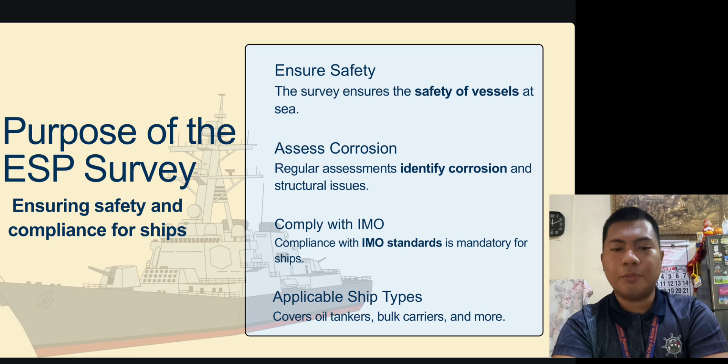The core purposes are safety first, corrosion and structural monitoring, IMO compliance and broad applicability. Ship particulars. 1. Ship name indicates the vessel identified clearly.

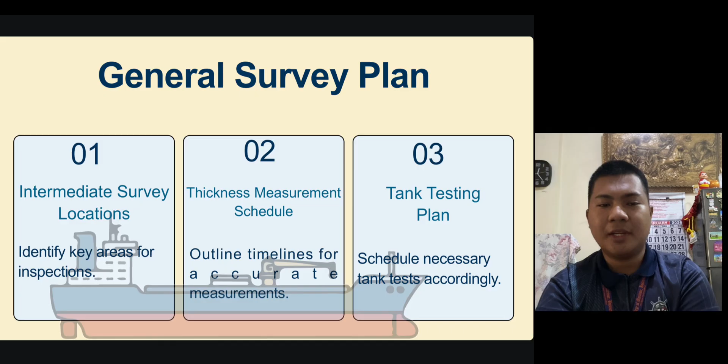Corrosion risks and inspection: key considerations for effective ship surveys. These slides outline what surveyors look for when assessing how rust and chemical reactions might be weakening a ship. Cargo history: reviewing prior cargoes, noting corrosive material use. Surveyors check what the ship carried in the past, as some materials like high sulfur coal or certain chemicals accelerate corrosion.

Coating type: assessing the condition of protective coating applied. Modern ships use protective paints and coatings. This step assesses if that armor is still intact. Structural deterioration: identify signs of wear and potential leakages present, finding physical signs of wear or spots where the hull might be leaking. Corrosion protection: verify measures in place to prevent structural damage, checking systems like sacrificial anodes or impressed current systems that are designed to prevent rust.

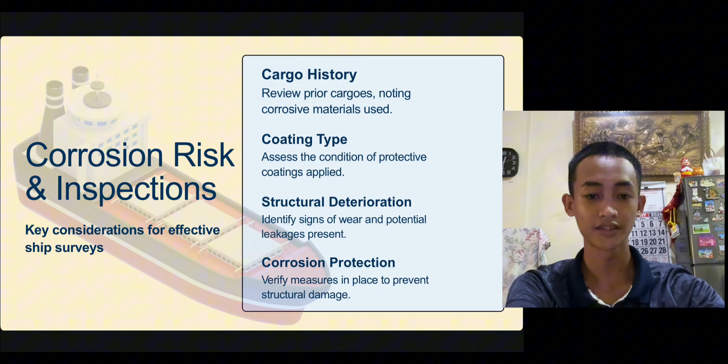Inspection and safety details the regulatory and management framework for maintaining ship standards and addressing issues found during surveys. It breaks down into three core components. Number 1. Port state control: reports on deficiencies and corrective actions. This refers to the inspection of foreign ships in national ports to verify the condition of the ship and its equipment comply with international regulations. It involves generating reports on deficiencies, problems found, and the corrective action required to fix them.

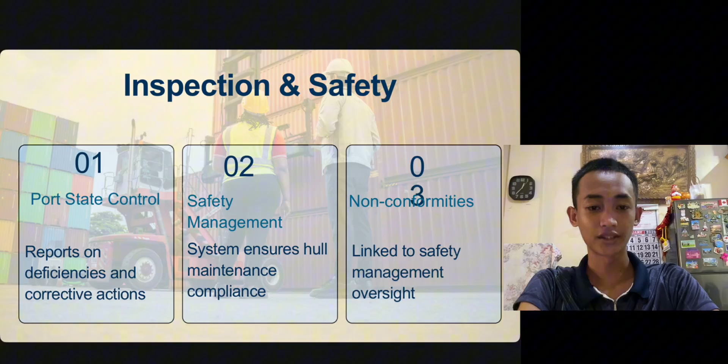Number 2. Safety management system ensures hull maintenance compliance. This focuses on the internal procedures of the ship and the operating company. The system is designed to ensure hull maintenance compliance, meaning there is a formal process for regular checking and maintenance of the ship's structure. Number 3. Non-conformities linked to safety management oversight. A non-conformity occurs when a requirement or standard is not met. These issues are linked to safety management oversight, ensuring they are tracked, managed, and resolved through the ship's official protocol.

Close-up and thickness survey: key aspects of survey execution explained. The physical execution of ship surveys, which are vital for verifying the structural health of a vessel. Survey location: identifying the specific areas for close-up inspection. Inspection identifies specific high-risk areas of the ship that require close-up physical examination. Special rules: regulations apply for ships over 130 meters long.

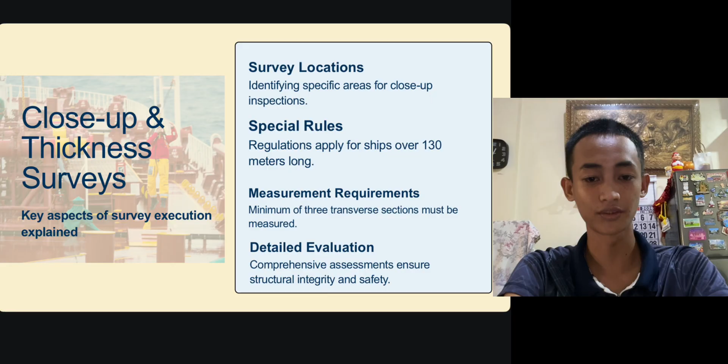These are specific regulatory requirements that apply to larger vessels, particularly those over 130 meters in length. Measurement requirements: a minimum of 3 transverse sections must be measured. To ensure a comprehensive look at the ship's skeleton, a minimum of 3 transverse sections must be measured for steel thickness. Detailed evaluation: comprehensive assessment ensures structural integrity and safety. These assessments are used to provide a final confirmation of the ship's structural integrity and overall safety.

Permissible diminution: understanding allowable thickness reduction for safety. Diminution refers to the thinning of the ship's steel due to rust and wear. This slide explains how much loss is legally allowed before the ship is considered unsafe. Ship categories: thickness reductions vary based on the ship's category. Allowable thickness reductions are not universal. They vary based on the specific category of the vessel.

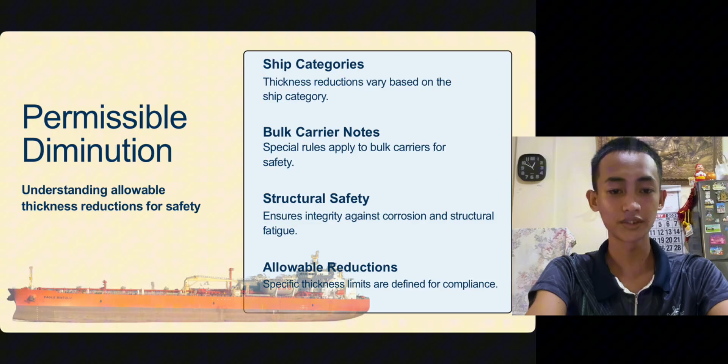Bulk carrier notes: special rules apply to bulk carriers for safety. Bulk carriers have unique safety rules regarding steel thickness due to the heavy, abrasive nature of their cargo. Structural safety ensures integrity against corrosion and structural fatigue. These limits are strictly enforced to prevent catastrophic failures caused by corrosion or structural fatigue. Allowable reduction: specific thickness limits are defined for compliance. Compliance is determined by comparing actual thickness measurements against predefined specific limits.

Access provisions. Means of access: various methods ensure safe surveyor access. Various methods are employed to ensure the surveyor can safely reach all parts of the ship. Survey equipment: specialized tools such as the ultrasonic thickness gauge are used for accurate data.

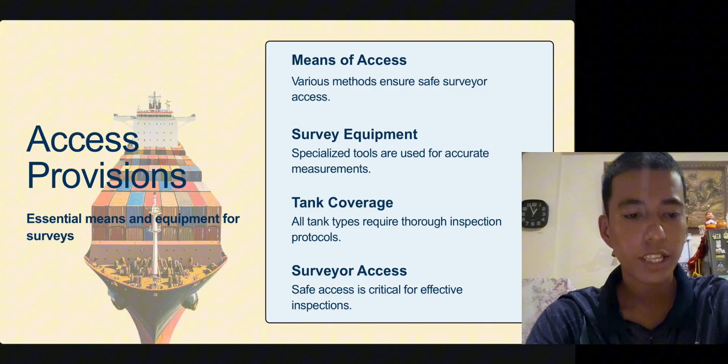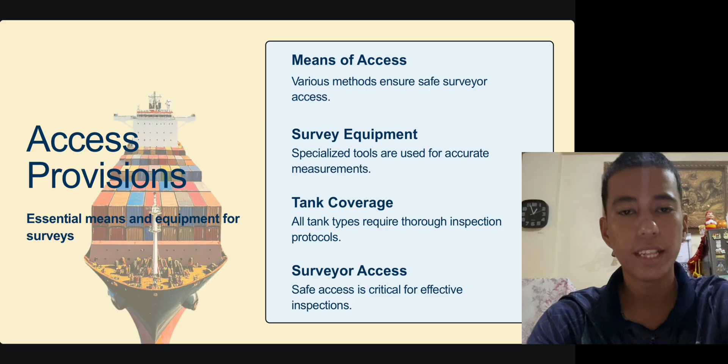Tank coverage: all types of tanks on the vessel are covered through inspection protocols. Surveyor access: maintaining safe access is highlighted as critical for effective inspections. Tank particulars. General arrangement: attach a detailed plan for tank layouts, a map or blueprint showing where every tank is located on the ship.

Tank types: specify the types and frames of each tank. Identify whether each tank is used for freshwater, fuel oil, or saltwater, and where its structural ribs and frames are. Coating conditions: checking the paint or protective lining inside the tanks. Is it rusty? Is the paint peeling? These coatings prevent the metal from thinning. Reminders: including owner and surveyor safety notes, important safety notes for the people doing the inspection and paperwork requirements.

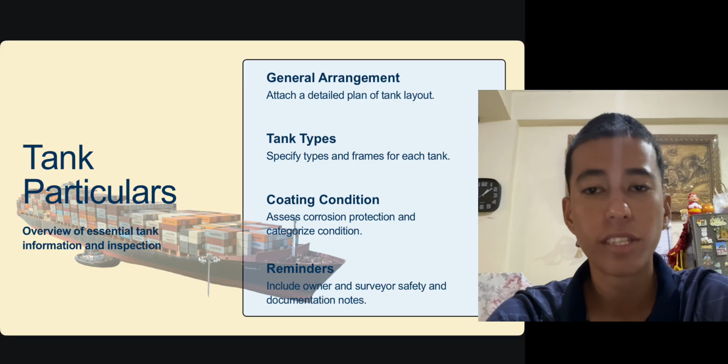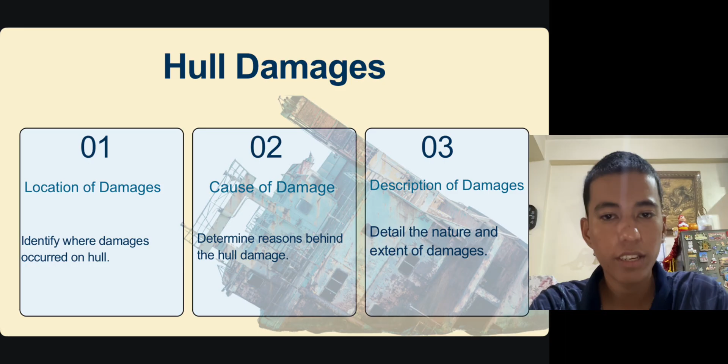Hull damage. Location of damage: identify where the damage occurred on the hull, exactly where on the ship's body the damage is found: the bow, the stern, or the bottom. Cause of damage: determine the reason behind the hull damage, investigating how it happened. Was it collision, heavy weather, or perhaps simple wear and tear? Description of damage: detail the nature and extent of damage, a detailed report on what the damage looks like, such as a dent, a crack, or a hole, and how big and serious it is.

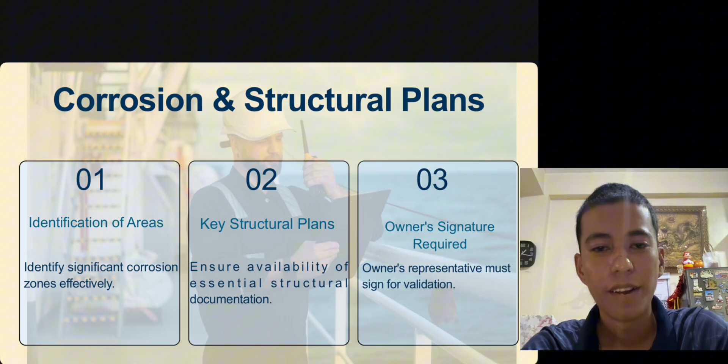Corrosion structural plans. Identification of the areas: identify the significant corrosion zones effectively, pointing exactly to which parts of the ship are most likely to have rust or corrosion. Ensure the availability of essential structural documentation, gathering the ship's original blueprints and documents so the team knows the design limits. Owner signature required: the owner's representative must sign for validation, a formal OK from the ship owner's representative to validate that the inspection plan is correct.

Critical areas: focus on structural risk in ships. Deckhead corrosion: regular inspection prevents serious structural deterioration. The ceiling of the internal ship compartments is a common spot for rust because of trapped moisture. Hatch corners: vulnerable spots prone to corrosion and damage. These are high stress points on the deck because they are corners. They are prone to cracking or wearing down faster than flat surfaces.

Buckling: monitoring is essential for maintaining structural integrity. Looking for metal that has been bent or buckled under heavy loads; this is a sign the ship's skeleton is weakening. Emphasizing corrosion risk: identifying risks helps in proactive maintenance strategies. A general focus on areas where salt water might sit, leading to thinning metal.